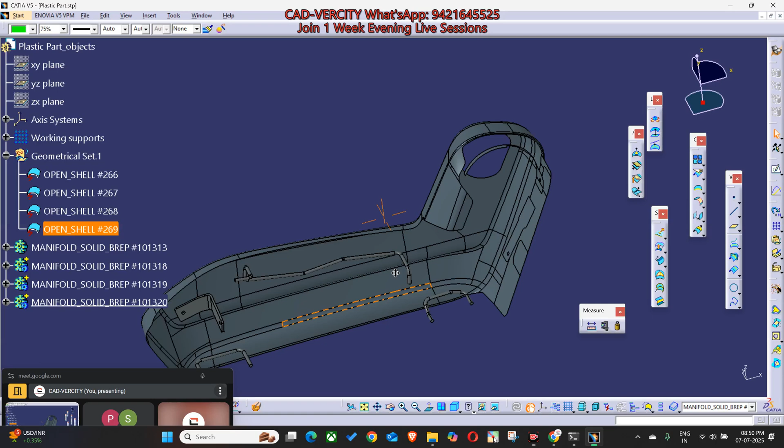Again, it is a side cover of the seat, and the input was this file. Okay, we have received this file in step file, and then what is the test requirement? Make B side surface.

Tooling line define. Tooling line. So as they have mentioned, tooling line means we have to define parting line as well. Okay, thickness will be 2.5 uniform thickness.

Okay, make highlighted feature, ribs needs to design as shown above. So highlighted feature, for the highlighted feature, let me paste here one image.

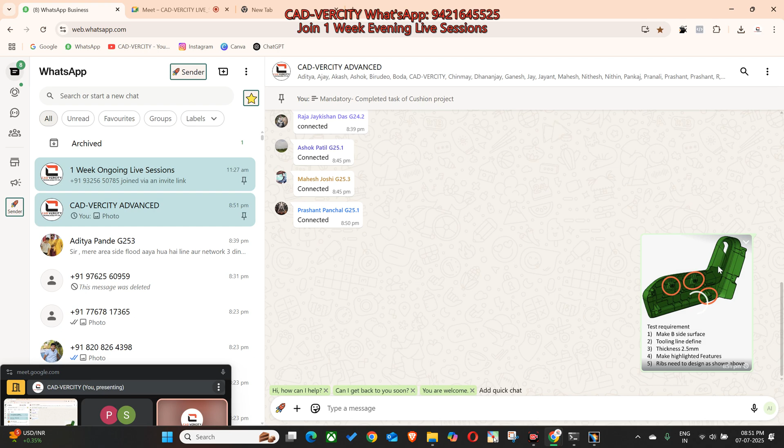Mahesh, is it correct? Yeah, okay, good. So here we have one, two, three hooks. These are the hooks. So we have to design hook.

So hook will be on. In this image, wire is in hide mode. So if we switch over here, I can consider this face, and the bottom one, this one. Let's change the color, make it yellow. So we have to design hook on this portion.

Okay, here will be another feature. Here I think we have screw. Is it screw? Yes. Again we have two screws from the back side.

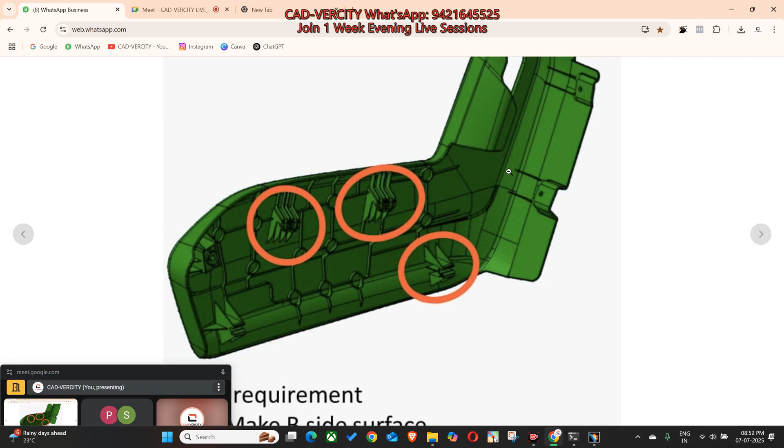Okay, these are the ribs. Yeah, we have screw because here is one metal bracket which will be fixed with side member of the seat. Okay, if I draw, just a minute, let me take a section

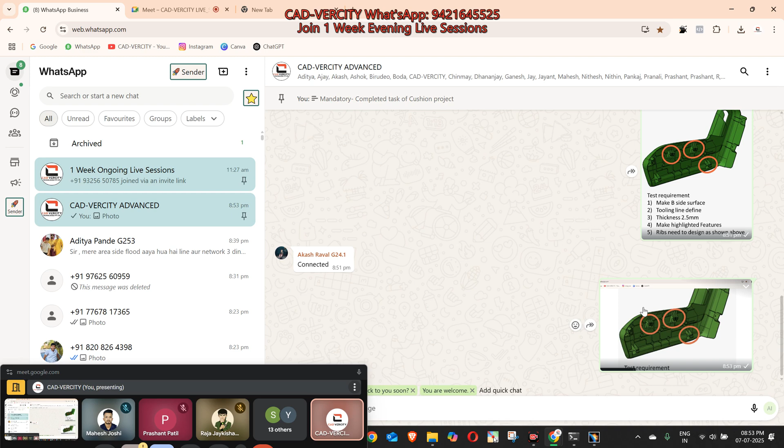like this. So, okay, let me show you the metal bracket. Can you see the metal bracket? Here we have again one hook.

Let's change the color. On this patch, we will apply screwing. So can you see this bracket? If I draw this bracket in this image, it will be something like this.

1, 2, 3, 4, 5. Can you imagine, yes or no? Here we have to add one screw like this. Clear?

And here we have one wire like this. One, it will be welded again with the side member. Here we have something inclined, then again horizontal, then again inclined. Then we have something like this, and we have a separate wire like this.

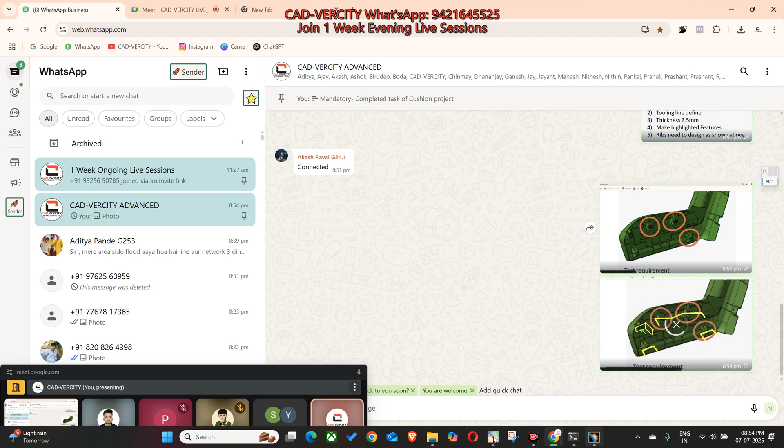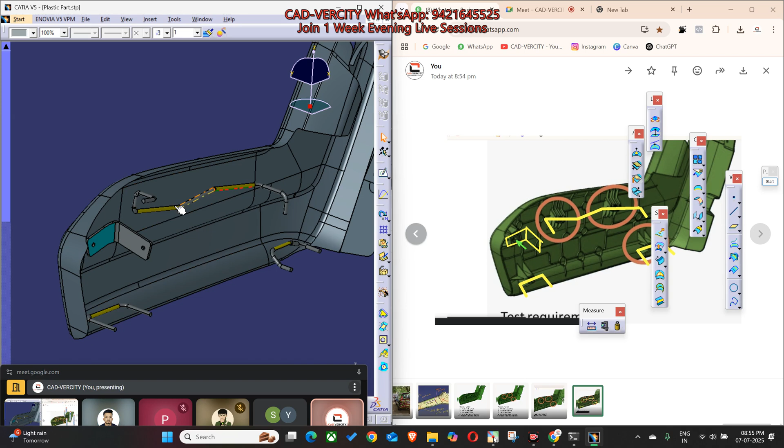Okay, perfect. Any doubt? No, sir. Like this. Clear? Yeah. Here we have one fixation for screw. Here will be one hook, one, two, top side hook, bottom hook, on the back side.

Okay, here you can see they have given some surface. What is the use of this surface? These are the surface of the metal structure. We can call it as, let's say, side member. Remember what is side member, everyone?

Let me open the file. Pillar side cover. Raja, do we have side member in this part? Hide and show.

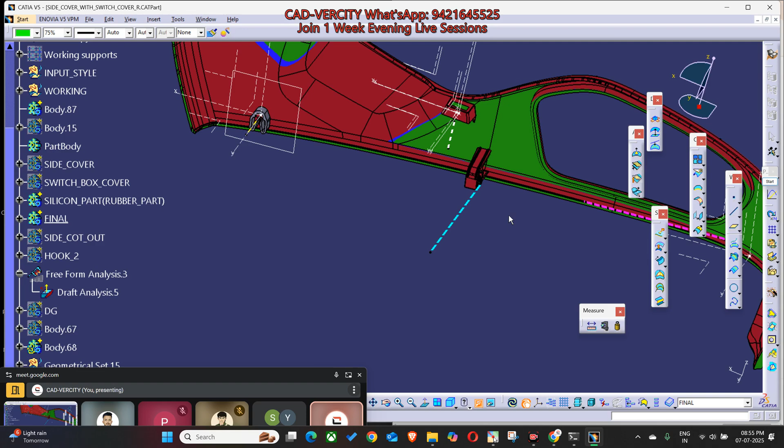No, okay, just a minute. Can you see my screen now, everyone? Screen recording on. Okay, so here you can see this is a side member. Can you imagine? Side member.

Yes, sir. So if I, this is the question, let's hide it. Can you see this part? Yes. Can you see this part? Yes, sir. We call it as side member.

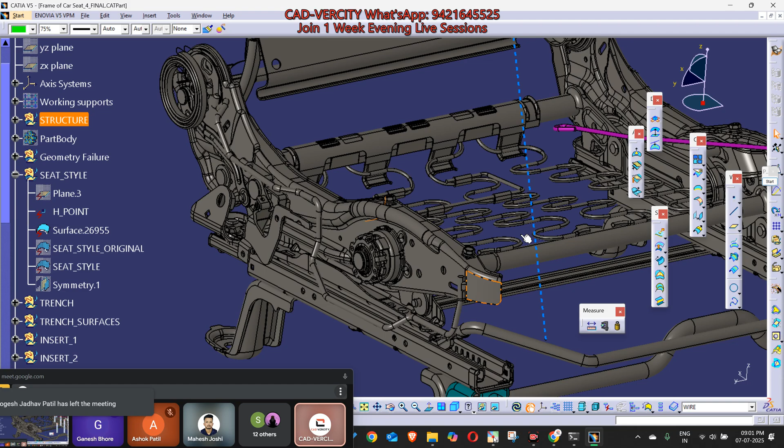This is side member. So if right now we don't have the side member, but just imagine if I say vertical window, hide this one, hide this one, again vertical window. Okay, now it is something like this.

So let's keep our metal structure with same orientation like this. Now can you imagine you are going to assemble this part. Okay, let's keep like this, and it will be something like this.

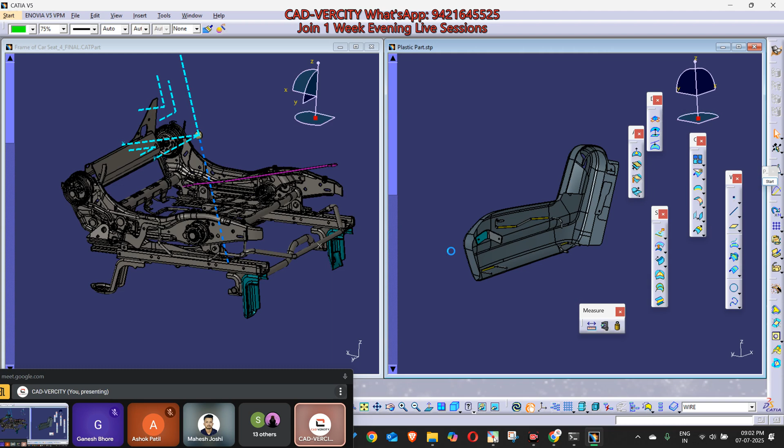Now can you imagine we are going to assemble this part from this side. Okay, let me try one thing. Product new, I will take one product.

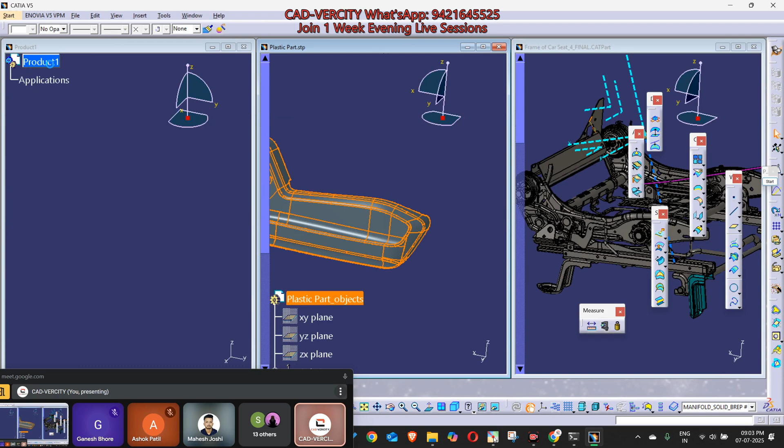Okay, vertical window. Copy this file. Copy, paste. Let's copy this product. Paste. Right click. Representation, terminal node.

Cancel. Here you can see. Can you see the side cover and our structure both are in different position.

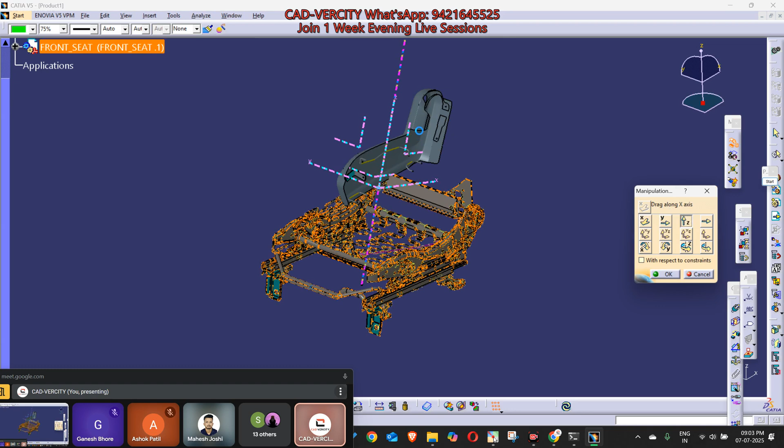So just for learning purpose, what I will do, I will just use manipulation. I will move this in X, again in Y. Can you imagine? This cover will assemble from this side,

something like this. Okay, let's keep click on Y. Sorry, X, Z, again X, like this. Say okay.

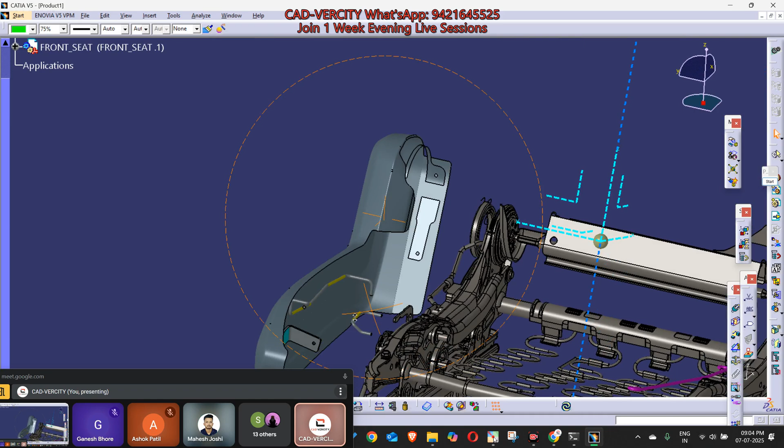Okay, now so what, how will be the wire assembled with the structure? Can you see this land? Let me change the color for this one. Make it blue. Make it purple. Again, make this purple.

Make this purple. Okay, so here you can see the purple color area. It will be welded with the side member. This is the side member.

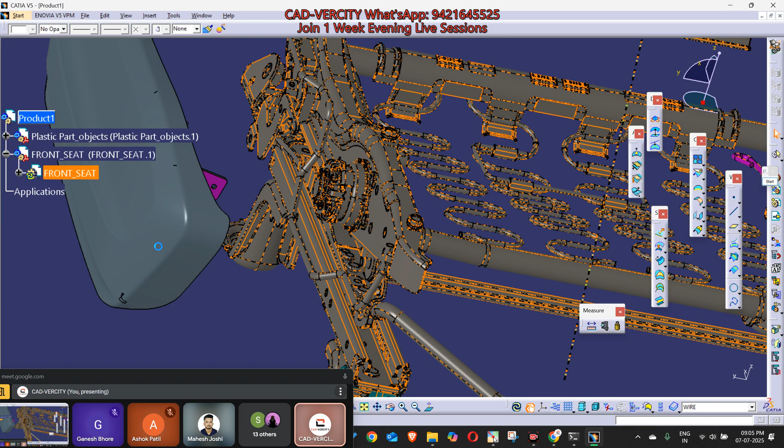Can you see? It is not a separate part right now in my file, but imagine this will be a single sheet metal part. It will be a separate part.

Okay, right now it is not a separate part, it is in a single geometric set. That's why I'm not able to show you it in different color. Okay, let me try.

Okay, let's convert this. Remove this one, say okay. Now it will be a single surface. Good, let's change color. Okay, it's already in different color.

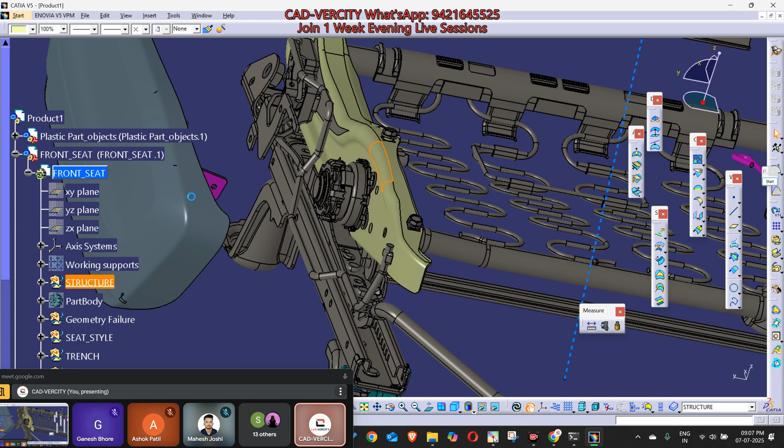No issue, I will make it isolate. Just a minute. Right click on this last option. Make it isolate.

Okay, now again, minimize, minimize. Okay, now can you imagine? See, the complete, this surface will also be the part of this one. Okay, so can you imagine, one, two, three,

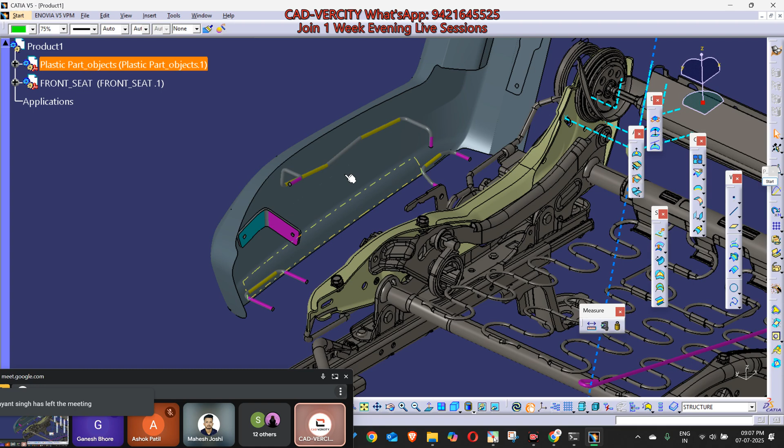three wires and one metal bracket are already welded on the side member. Now you have the side cover, with no switches over here. So you have to assemble this side cover on this wire.

Okay, so just for you, let's do one thing. Let's hide this one. If you want to see how it will be assembled, let me move this in Y side. I will just keep it dump. Okay, this is okay.

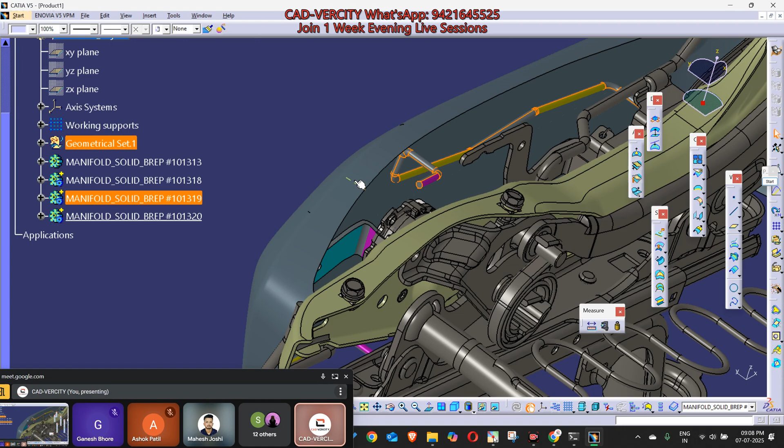Okay, right click, center graph. This body, double click. Copy this one. Hide it.

Double click. I will put that four bodies in this body as a result, say okay. Now see, double click. Right click, center graph, hide all four bodies. Now here you can see.

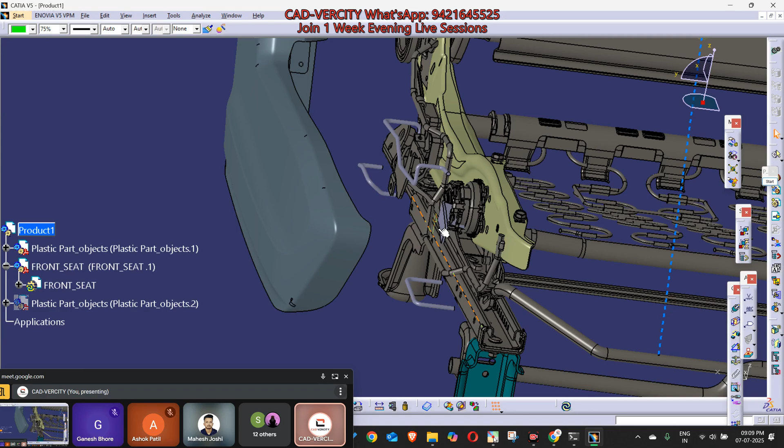Can you imagine now? See, this bracket is already welded on the side member. Wire is welded on this side member. This wire is also welded over here somewhere, and this wire is also welded.

Okay, now your job is to design this side cover, which should be assembled with this element. So what is this surface? This surface, this and this.

Just imagine that here we have some metal. Just a minute, I think we have metal. Let me show you, remove this faces. Delete these faces. For which one? That two extra surfaces. They have told me to delete that.

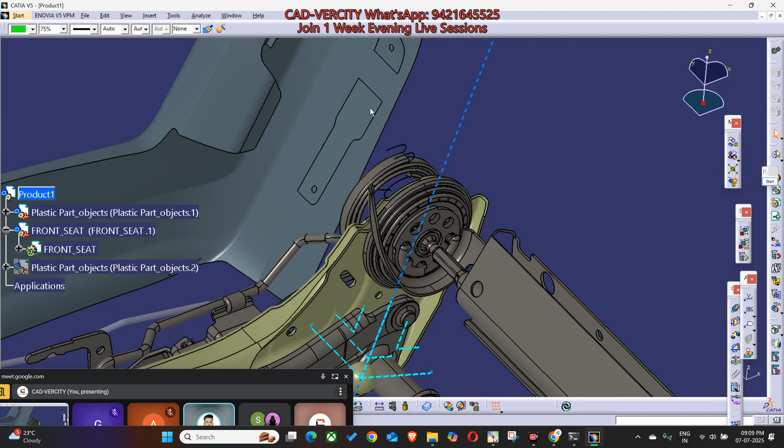Yes, see, these two surfaces are not the part of the side cover. Okay, let me show you what is this. Now can you imagine this surface? Can you see these two surfaces?

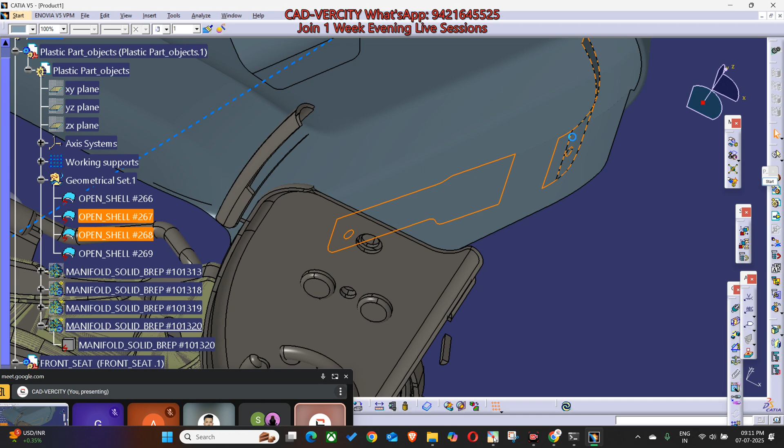Let me change the color for this two again. One, two, three, make it green. Okay, so the green surface is not the part of the side cover. Green surface means this part.

Can you imagine, yes or no? Yeah, green surface means this part. Yes. Okay, let me change into green. Okay, so just imagine now you can hide this surface. Hide it. Now imagine you have the green surface.

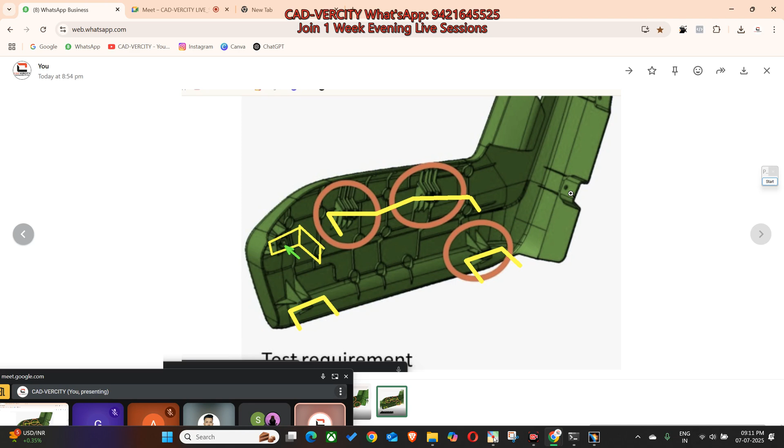Okay, here they have mentioned, where is the screenshot? They have mentioned, okay they have not mentioned, but in the image here you can see, one, two, they have used two screws. Okay, so here we have some patches.

So this screw, this position, here we are going to use screw like this. So we should have holes over here. Can you imagine, yes or no? There will be two holes on the side member.

Here, yes sir, we will have one hole. Here we will have one hole, here will be the second hole. Okay, so once we assemble the complete side cover, we are going to use a screw gun from the rear side.

Got it, Mahesh? What is the use of green surface? Yes sir. Now done, now what is your job?

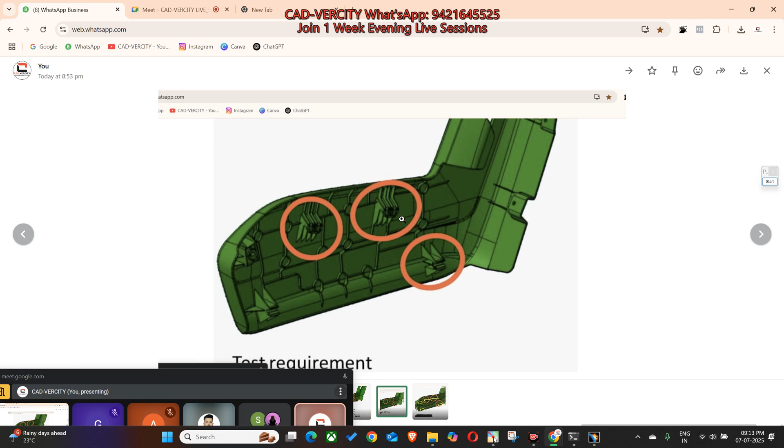Your job is to create one, two, three features. Here you can design a simple doghouse with screw boss. Here you can use power copy, no issue. Even though you can use axis to axis transformation. Here you can add two features. Now tell me, where is your doubt now? Where is the blocking point?

Mahesh? Others? Sir, they haven't given that feature, sir. So how we... can we decide? Okay, yeah.

Okay, so Raja, Ganesh, Prashant, we have learned how to design hook. Remember? Ganesh? Yes sir, yes sir. Mahesh, we have already done that part, okay.

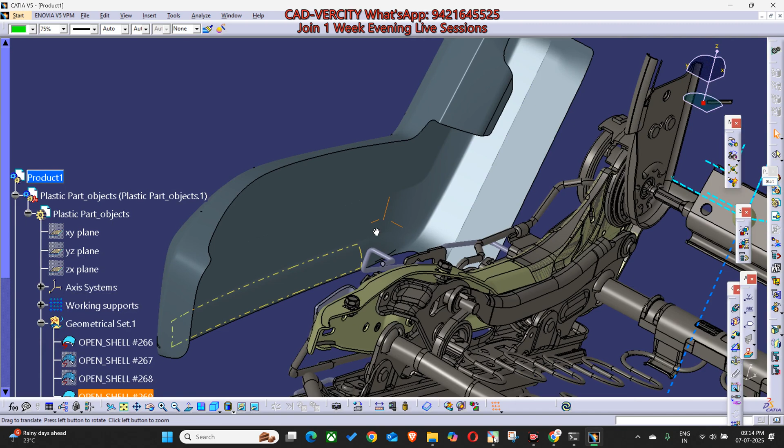But for the second batch, means Ashok, Subhajit, and Shweta, we have not done this. So we will start this from Wednesday or Thursday, okay. We will learn how to design hook, how to design doghouse, how to design snaps, locators, okay, parametric for any feature. Now we have this one.

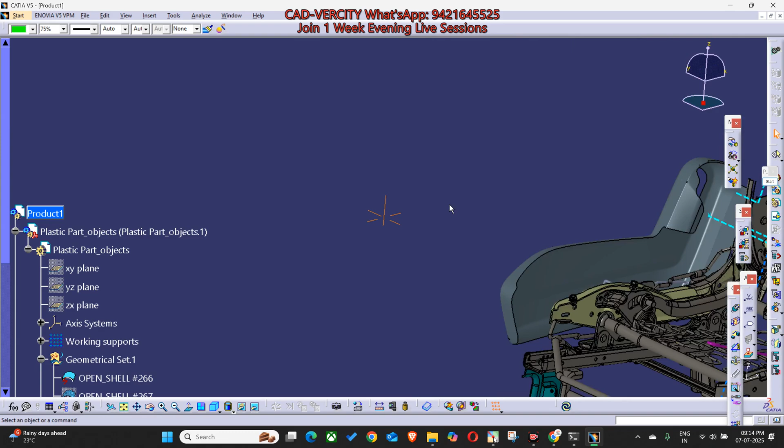Now our target is to design hook over here, on the bottom side as well. But the way in which we learned the hook design, we don't have to use the same methodology, okay.

Every time we will have to change our design as per our fixation requirement. You will have to check the assembly direction. Remember last time, side cover, in which direction we assembled the side cover last time in our project? In Y direction, Ganesh?

Z direction, Ganesh. Sir, remember we have slide from sir, Z, Z direction, sir. Everything was clear in Y direction for the main tooling, but assembly was in Z direction. Remember the switch cover, switch box, Ganesh? Yes, Akash, yes, Ashok, remember?

Sachin is here? Yes. Okay. Subhajit, are you in office? Yes sir. No? Okay, I'm in room. Okay, good.

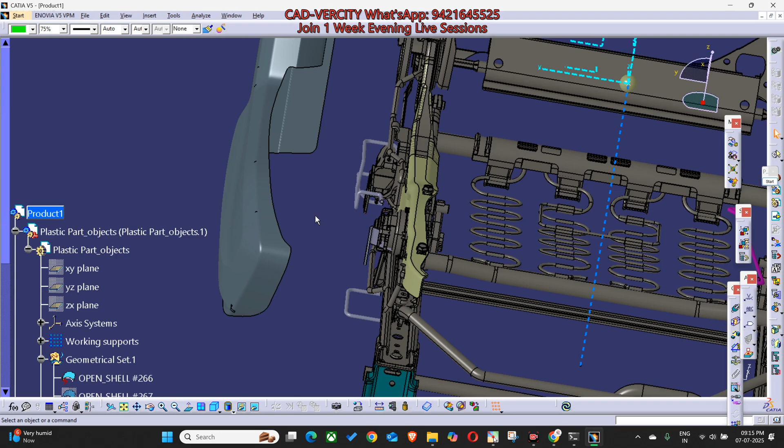Okay, so now this time again you have to think and decide from which direction you will assemble and how will be the fixation. What do you think the assembly sequence will be? This wire and the bracket, three wires and the metal bracket is already welded on the side member. Now tell me how will you assemble the side cover on this one, quickly?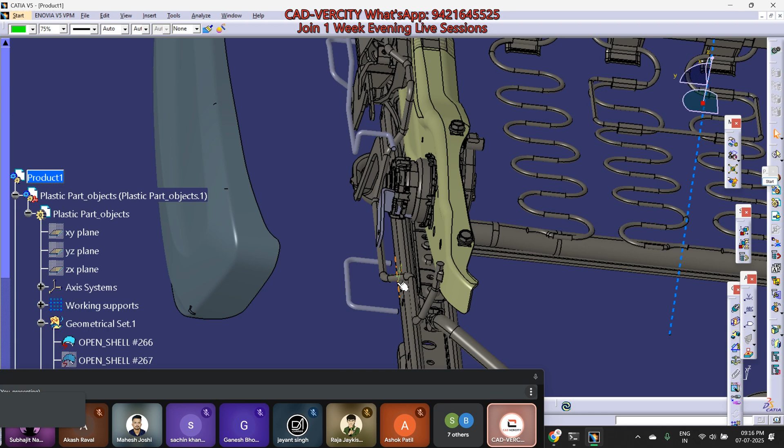Sir, we will take that bracket, this bracket, and both side holes, take center point of both sides, and take the line from it. Okay, no, but first of all, tell me what will be the sequence. Which feature will you lock first?

Will you do screwing or will you lock the hooks first? What do you think? Hooks. Chinmay is saying hooks first. How many screws do we have to use total? One, two, three, backside. Total three, correct? Yeah, three.

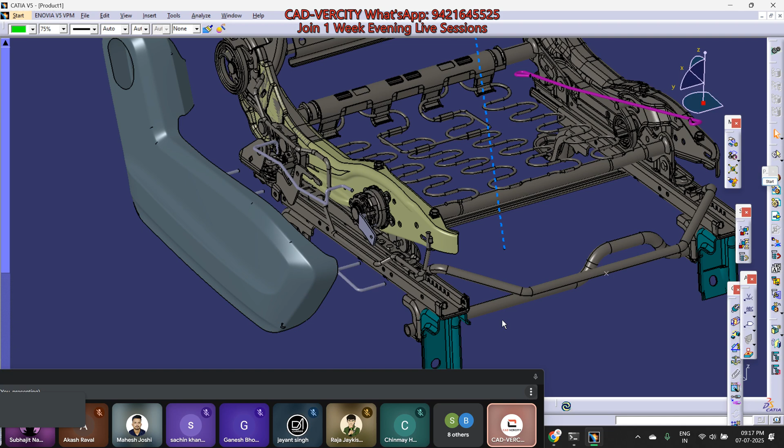And how many hooks do we have? One, two, three, total four. Because I haven't seen that type of features before, sir.

Okay, see, before. Suppose this is your wire, okay. Sorry, let me change the color. Suppose this is your wire. Now your green wire is going like this, okay.

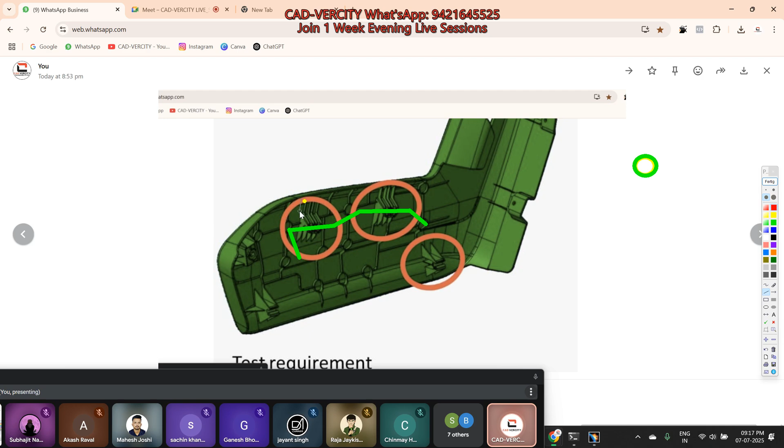Yes, perfect. Now for these two hooks, for the green portion, the hook will be red color. Now for this feature, one and two.

Suppose this is cover, okay, this is your cover. Your hook will be something like this: one, two, three, four, five, six.

Can you imagine your red portion, this hooks? Yes or no? No, sir. Others, Jayant, Sachin, those who know how to design hook? Yes, sir.

And for this feature, the bottom one, let's say bottom wire is something like this: one, two, three, four, five, six. For this bottom feature, if I draw the wire over here, now this is your bottom wire, these two wires. Your feature will be something like this: one, two, three, four.

Okay, so if I design this one, it will be something like this again. It can be something like this: one, two, three, four, like this. Got it? This will be circular. Can you imagine? Yes or no?

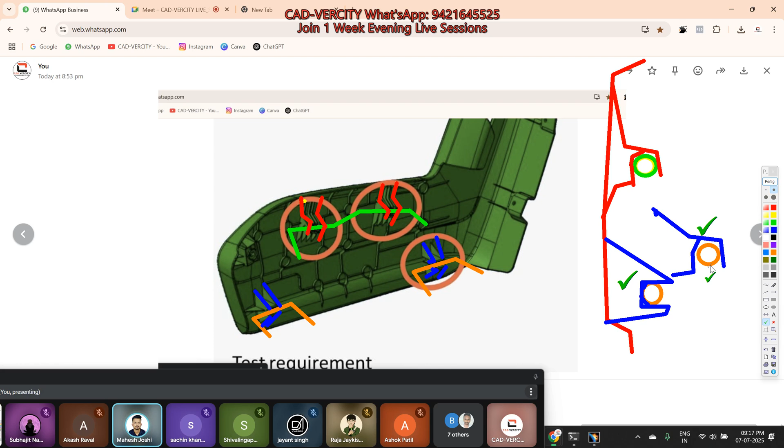Means at the same time you will lock the upper hooks, these two hooks, as well as the bottom hooks, in the same direction, using the same feature. So up you will bring your side cover like this and move it down a little bit.

Means the first operation will be you first lock all hooks. Now see, within two hands you have held the side cover. Now you have locked your side cover on this wire. Now tell me, can you remove your hand?

Yes or no, can you remove your hand? Suppose you are a person on the assembly line. Your both hands are free now, once you lock the side cover on the wires, yes or no?

Yes sir. Now from one hand you will use the screw, from the right hand you will use the screw gun. Now can you put one screw from this side and use the screw gun? Yes or no, from this side, because the cover is already assembled on the wire.

It is already locked. Now your both hands are free. We call this pre-locking. What we call pre-locking.

So is it important? Yes, it is very important. Pre-lock.

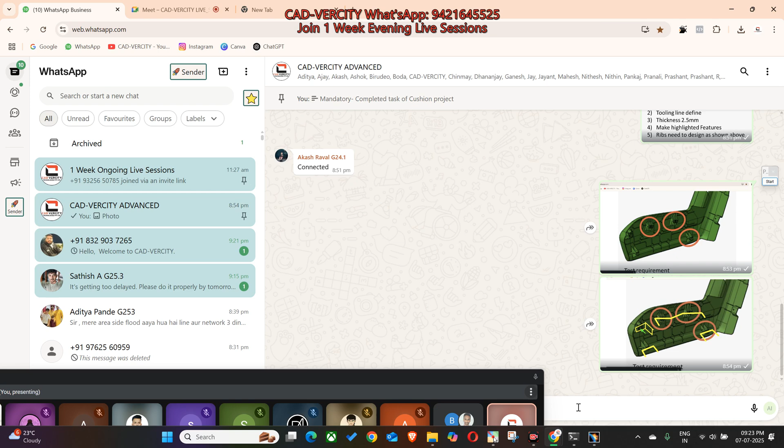Once you pre-lock this wire, you can use the screw gun through this hole. Then I will move to the back side. I will check the two holes from the back side.

We have these two patches, so there will be two holes on these two patches. I will put one screw, first tighten this one, then put the third screw, and again use the screw gun.

Okay, got it. Clear? Venkatesh, Shiva, clear. Birudeo, any doubt? No doubt sir, clear.

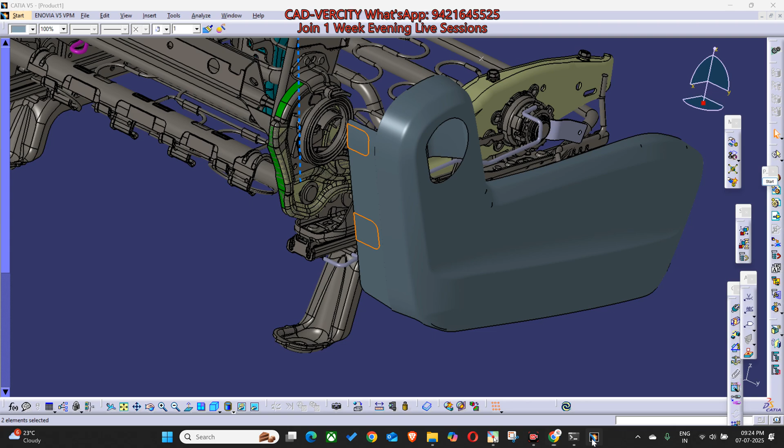Okay, now it's your job to convert this part into a closed volume with 2.5 mm thickness. Raja, Ganesh, Akash, Sachin, Chinmay, Prashant, both Prashants, Jayant - okay, now you have received this input.

And what was the time, Mahesh? Time limit? Sir, 1 hour. 1 hour, so 2 hours fast.

They have given me for remastering the sheet metal part, for remastering, and also its drawing for drafting, and this plastic part also - they have given me 2 hours for all of it, sir.

Okay, three tasks for 2 hours only. So you have to finish all 5 points within 1 hour. Okay, but it is easy, I think so, it is easy.

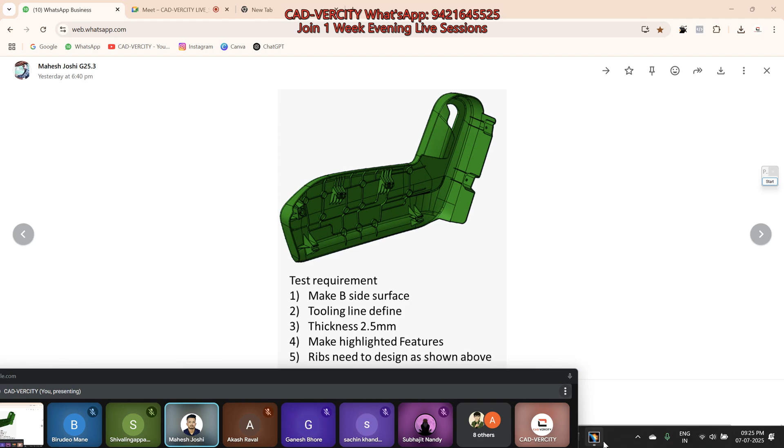If the surface is okay for the offset of 2.5 mm, then it is easy. Right click, open in new window. Say okay - sir, it has a patch, sir, in the A surface also.

Okay, let me check. Where is the style? This one, right click and okay. What is the purpose of that patch?

The smaller one, okay, this is for locking purpose. Also to hide the rat hole.

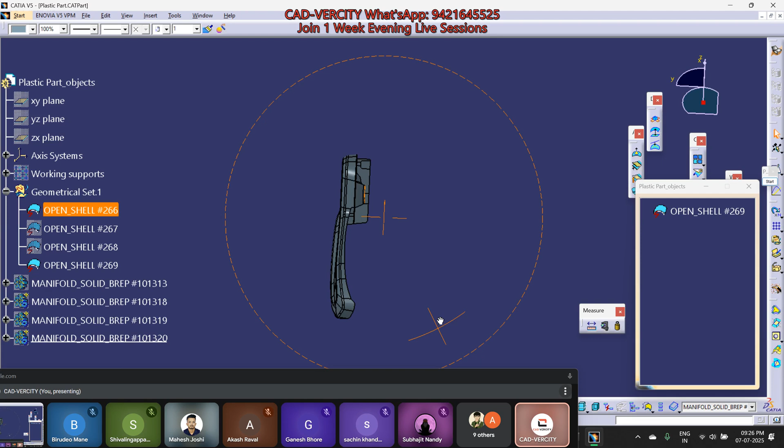What is a rat hole? Can you imagine? Let me tell you, rat hole means just a visible hole.

Suppose this is the backrest, okay. So the backrest will be something like this. Can you imagine?

And this will be the cushion, yes or no? Yes sir. This will be the bolster again. This will be the insert - sorry, this will be the insert area. Again, this will be the bolster.

Trenches. Okay, now there should not be any visible hole throughout this area, meaning between the side cover, backrest foam, and the cushion foam. There should not be any visible gap.

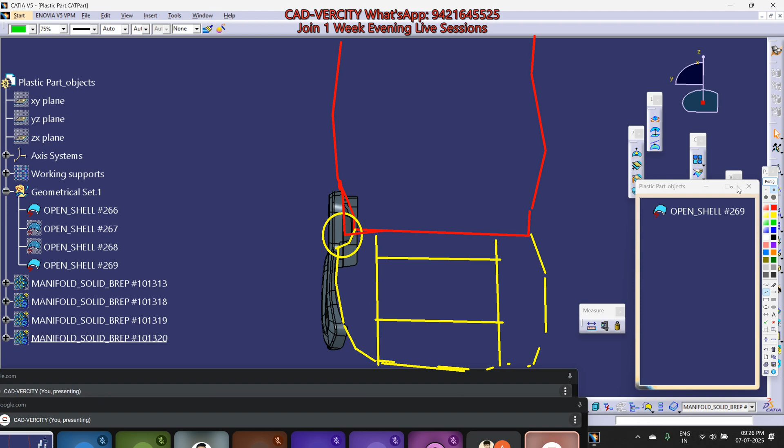Okay sir, then why have they added some extra material? We can increase the foam like this, or we can bring this foam directly straight like this. Yes or no? But imagine there will be some mechanism for the recliner. Yes or no? If I zoom in, why do they need this much gap?

Because of some recliner mechanism. So let me show you where the recliner mechanism will be. See, can you see the thickness? Yes or no? Can you imagine this patch will be over here within this gap?

This gap, yes or no? See, this cover style will not match this structure, so don't consider it like this. But just imagine, suppose if you design this style for this structure, it will be something like this. No, see, it will go up.

Okay, it will go inside. It will be some downside again, then come up, and it will be something like this. Can you imagine? Yes or no?

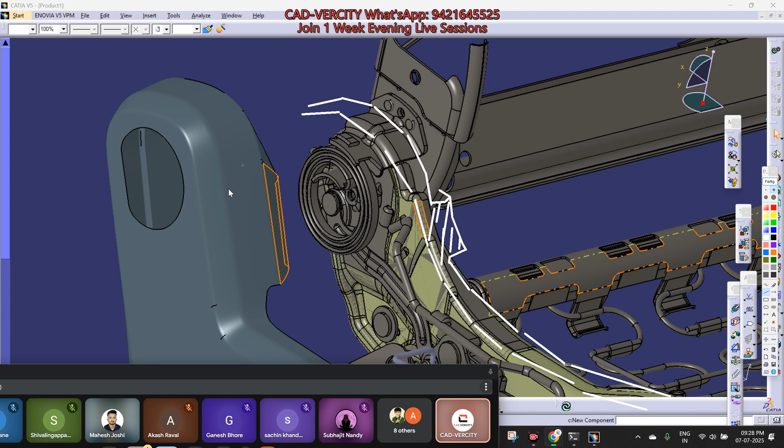Yes sir, so this patch, what we need to hide the hole, this is the patch. Got it? Yes or no? Yes sir, everyone got it - Shweta, others?

Okay, now we call it as a rat hole. Okay, done.

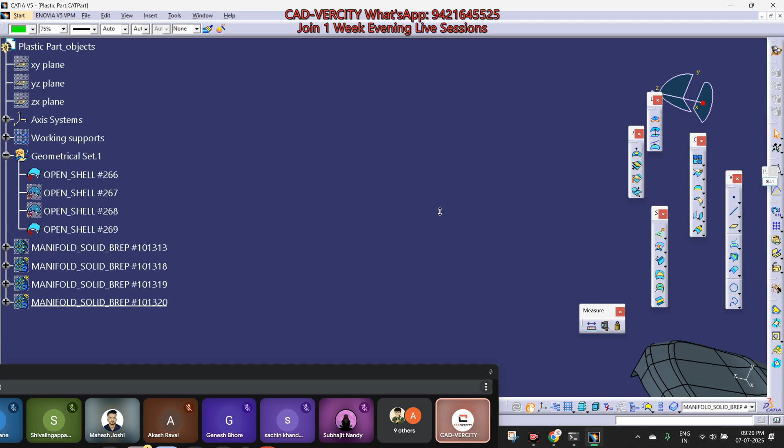Now let's start. Can you work on this one directly or do you need my help? See, if we add a geometrical set, let's check. Can we offset this one directly? Right click surface, okay, can you see?

Can you see what is this one? Any idea what is this? What is the use of this one? They will cut this part.

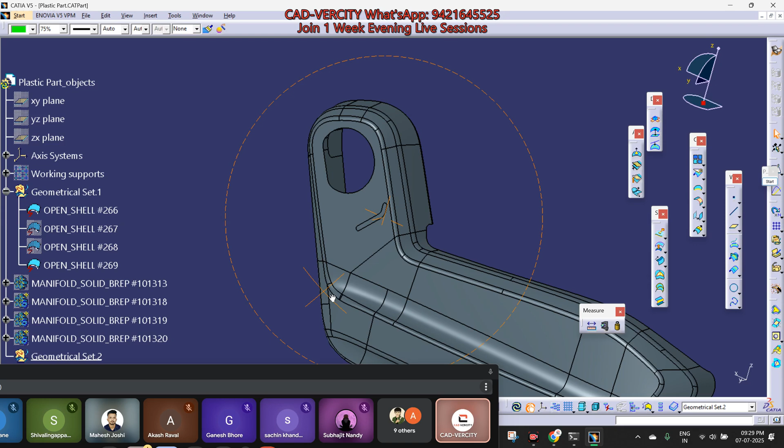No sir, see, there will be one pocket. From this one you will get one latch, like this. For recliner purpose.

Okay, you can just pull. You can hold this one like this. This will be the thumb and you can pull up, the seat will go back - recliner. That's why we will need one cutout over here.

Okay sir, shall I consider everything in closed volume? See, for closed volume you will have to avoid this cutout. Just treat this patch as a single patch without any holes.

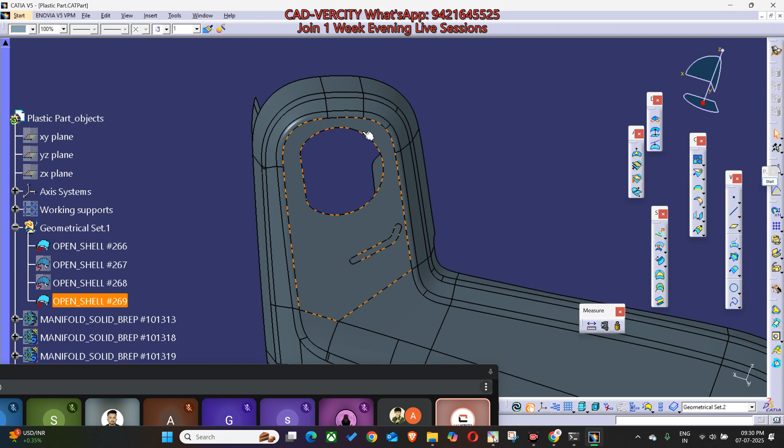Got it? You will provide the hole as per project requirement. Clear? So for the closed volume, you should close this hole. So how to close it?

See, extract, no propagation, isolate, say okay. First I will copy this one, paste in my geometrical set, right click, rename this one as my working.

Everything should be in caps. No use of this one. Right click, I will rename the surface as input style. Minimize, untrim, enter. Okay, I will hide this one.

I will use boundary for this - see, this is a trick. Please focus, I will use outer boundary, say okay. I will hide this one, show untrim, and split it by the boundary.

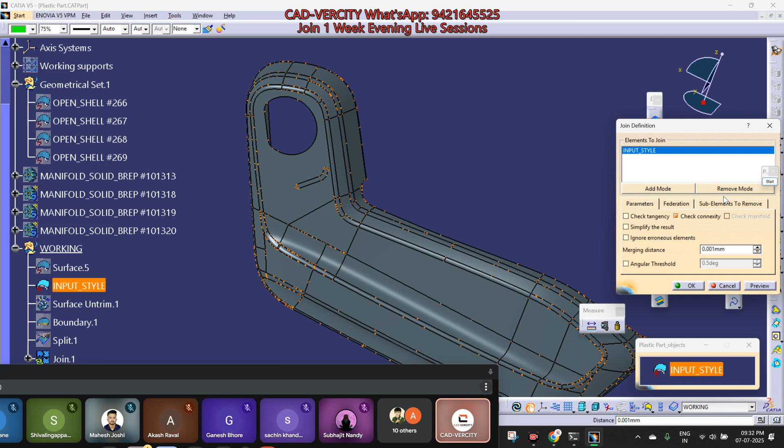Okay, now I will hide everything, show this one, apply join. I will remove that patch using sub-element to remove. First I will select this surface, then sub-element to remove - I will remove this patch as well as this patch. Then I will show the split surface and just join it.

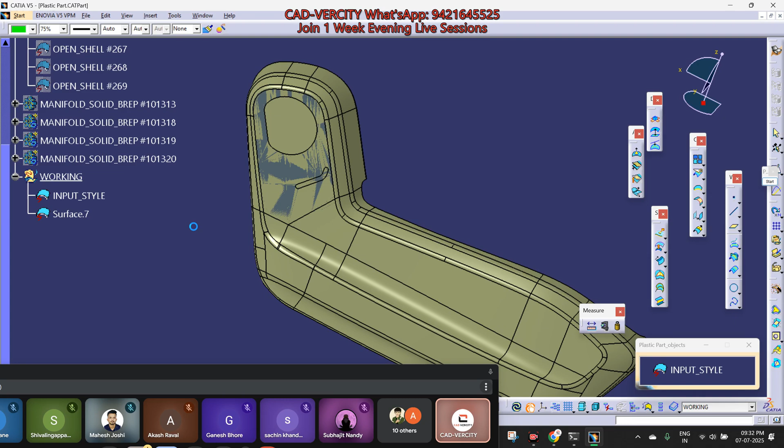Any doubt? I will make it isolate, delete everything, just keep the input surface. Enter. Any doubt? Clear? Prashant, Mahesh, Chinmay - yes sir, okay.

Now let's try to use offset. Where is offset? Offset this patch inside by 2.5.

Reverse, reverse. The cutout that was there - should we take it or not? No, you will have to avoid that cutout that was there before. You'll have to avoid that one. I will explain.

See, in the offset command, what it is telling you sir - the red patch, the patches which are in red, I'm not able to offset that surface, but I can offset the rest of the surface. So shall I offset? Say yes.

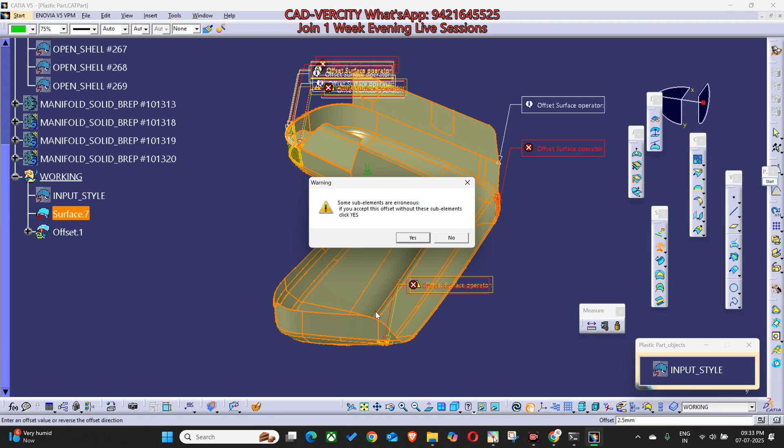Got it. So this is my input style. Change the color, make it blue. So this will be my outer surface. Suppose the blue is the A surface. I will take the offset inside.

Everything is good, but this patch is missing. I will recreate this patch. I will use this patch as a B surface.

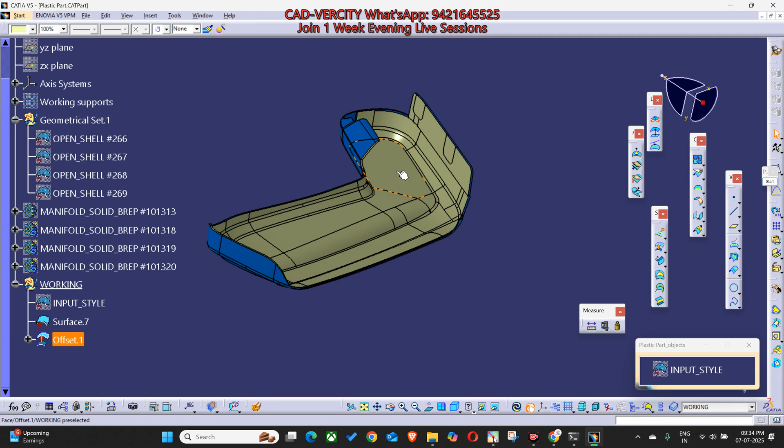Good. Nearly 95% is okay. So how to check? Select the surface and apply boundary. Let's check where the boundaries are. See, can you see a small gap? See this one.

Did you notice why there is a gap? Because of this hole, can you see? There are some missing patches in our A surface. We have one missing patch in the A surface.

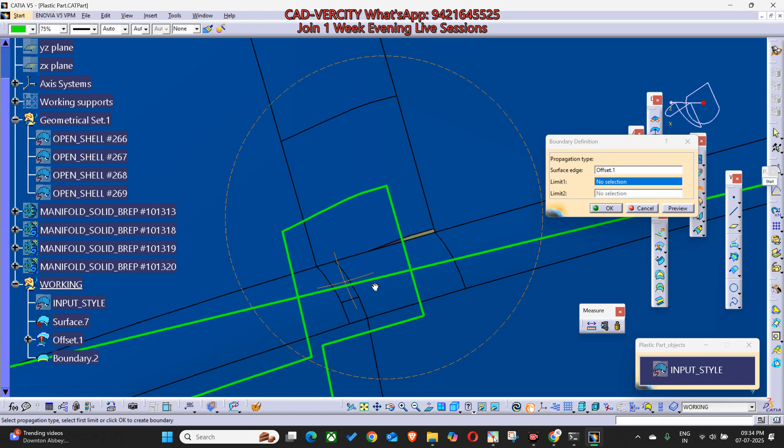Okay, yes, here sir, we have a gap. Here we will have to rework. Again, small missing patch. Did you notice again, why? Because of this patch, the bad surface.

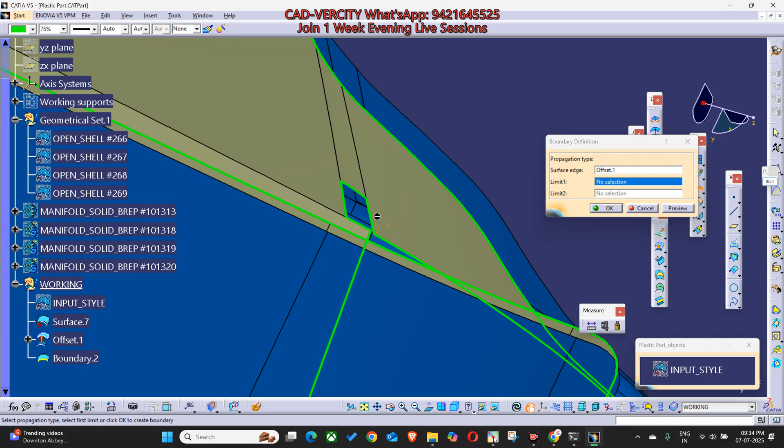Okay, so don't repair this one. Just try to fill inside because you don't have time. You have only 1 hour. In 1 hour, you have to finish the close volume.

Again, if I say okay, keep all sub elements, say okay. So I will keep this in this mode. Why? Because whenever I work, I will not use the boundary command again and again. I will just show and hide this command.

So I will work over here. Again I will show this one, I will check, okay, then I will work over here. I will hide this one while working. Again I will check with the boundary. So like this, you will have to work for the 2.5 mm thickness. Then you have this wire.

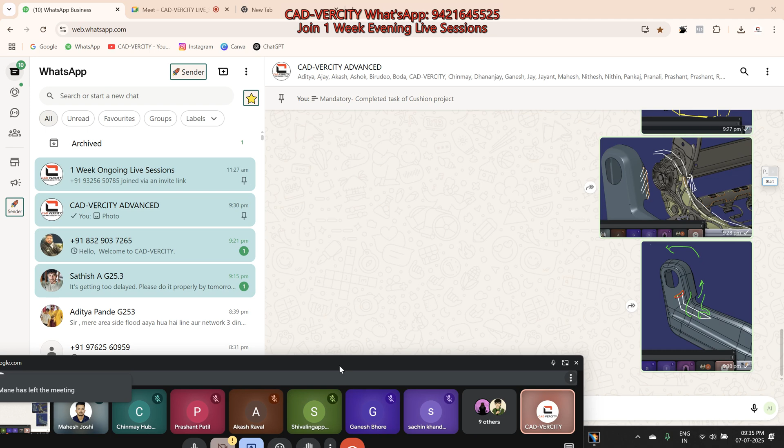Okay, now tell me, from advanced batch, tell me how will you start for the hook design?

Yes, Akash, Ganesh, Raja, Sachin, Chinmay - how will you start for the hook design? Quickly.

Yes, Raja, Sachin, Prashant. Sir, after close volume, then decide the lifter direction. Sorry sir, main tool direction, sir. Okay, MTD, main tool direction. Then after MTD is decided, okay, first will you work on the close volume or first will you decide the main tool direction? What should be the sequence?

How will you start? First the tooling direction, sir. Okay, tooling. Okay Prashant, then?

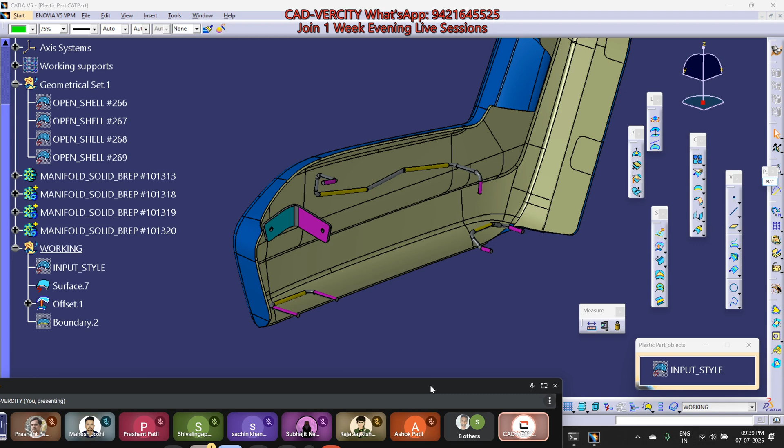Then draft analysis for what? To check the undercuts. To check the undercuts in, no, on which element will you perform the draft analysis? Class A surface, sir. Awesome. On A surface you will perform the draft analysis. Good. Then?

If everything is good, then we will proceed for the B offset. Excellent. Then, after completion of the B offset and C surface, we will make it close volume, and then we proceed for the B side features. Good. Then?

If they have provided any mounting features for the environment, sorry, we will take a point, sir, taking the reference from the environment. And then we will take an axis system on that point, and then with respect to the tooling direction, we will develop that one, sir.

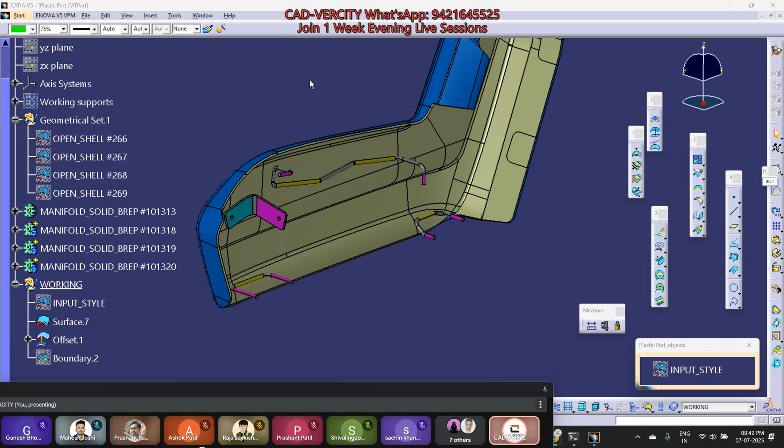So for the first feature, let's say I want to design one hook over here. What will be the first process? First step: extract the surface of the wire. Okay good. And then make it tangent to the curve.

Sorry, the hook - the profile of the hook should be tangent. Okay, see Sachin, as we discussed in this image, this one, the red one, yes, the hook will be like this. Okay.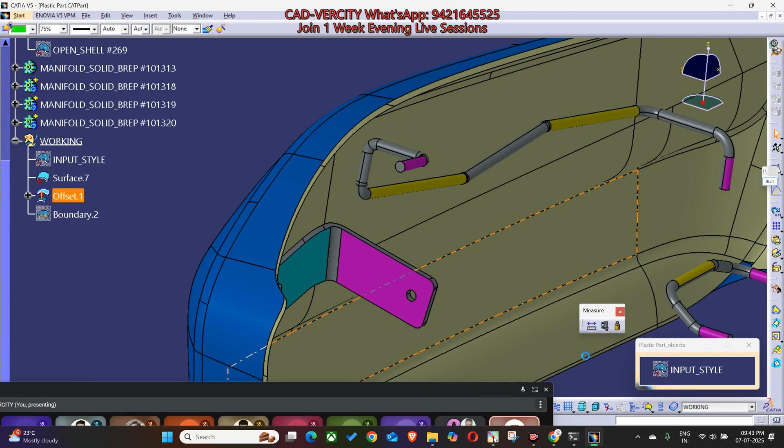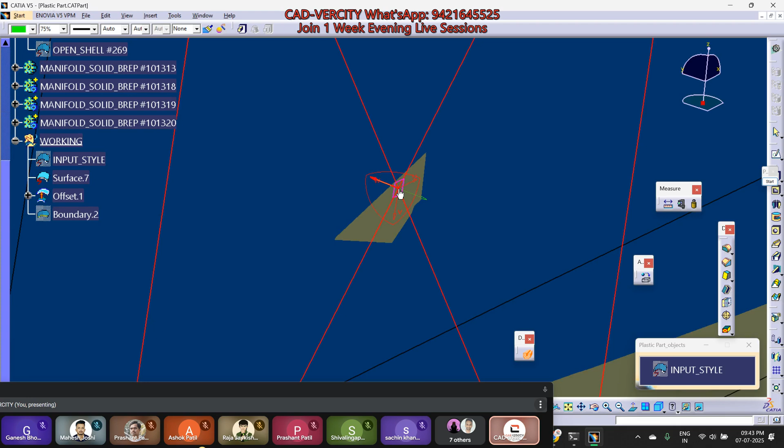So if I take a section in this view, means in X view, okay, someone will ask you - let's say Sachin is in a meeting, so I'm the counterpart, so I will ask you: Sachin, please take X section on the wire. X section means, here you can see the X direction. X section means section perpendicular to X, means on the wire, something like this. This is X section, can you see we are perpendicular to X nearly?

So if someone is asking you to take a normal section to the wire, or take X section on the wire, this is X section. If someone is asking you to take Y section, means this one - yes or no, this is Y section.

Okay, so we will take a point - it should be on the center curve. Yes Sachin? Yes sir, somewhere over here, the center curve of the wire. Then let's say our MTD is in Y. Then here is Y.

Next step, Sachin, what will be the next step? Prashant, Raja, Ganesh, Akash. Axis, axis system. Axis system, good Ganesh. How? What will be the orientation of the axis system?

As per MTD, as well as per the OR compass direction, wire, yeah.

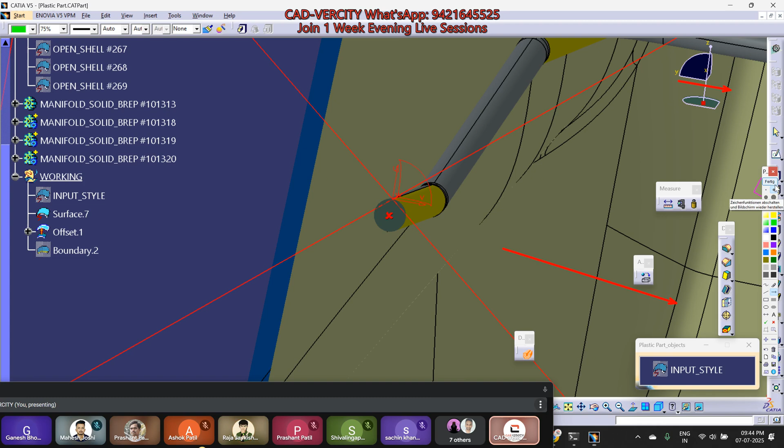Wire neutral axis. Okay, if I click on Y, wire is not perfectly in X direction. Click on Y again. Can you see it is inclined a little bit? If you click on Y, it is a side view. See, both are inclined. So our axis system will be upside and like this. Yes or no?

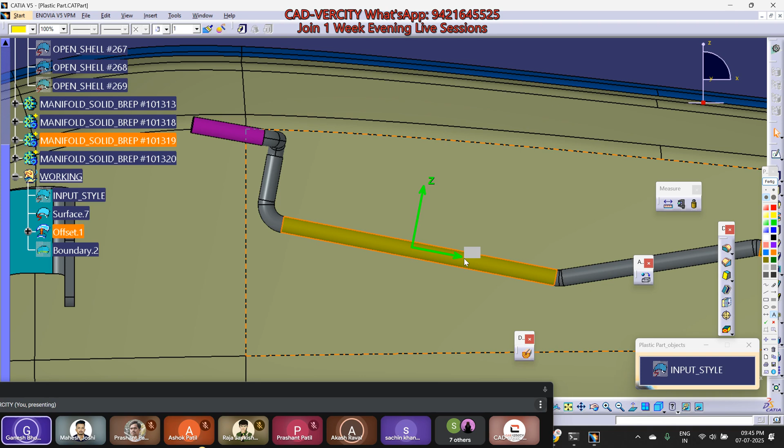And Y will be along the center curve of the wire. No, along MTD. Sachin, along the center curve of the wire, we have taken X. See? Okay, so how?

Just see, again let's click on Y. Again click on Y, I want backside view. Just focus on this one. Can you see this X, Sachin? Yes sir, that's why.

Suppose this is my, I will take a midpoint of this patch. This will be my Z, perpendicular to the axis. This will be my X. Can you see this is X? This is Z. And Y will be my MTD, yes or no? Yes sir, yes sir.

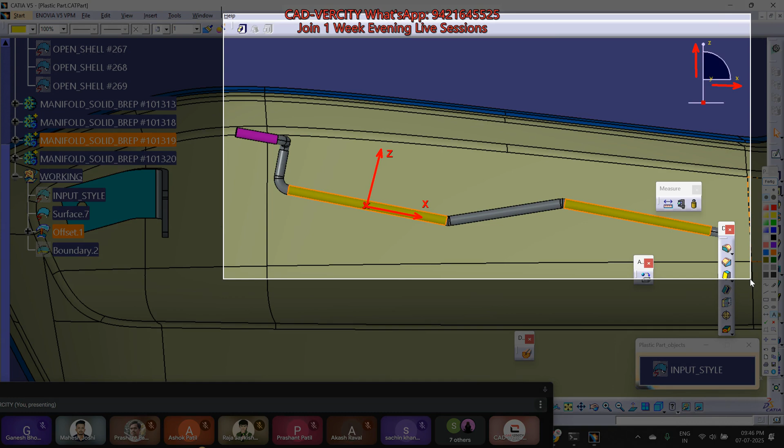Good. Now can you design hook? What you will use from this location to this location? You have to design the second hook.

Axis to axis, or power copy? Power copy and axis rotation change.

Where is your section? Okay, see these hooks are something different, okay? Yes, what you will use from this location to this location.

Quickly. Power copy, sir. Why power copy? Orientation is not identical, both features.

Okay, why not axis to axis? Copy paste special as a link, and then use axis to axis transformation. After that it's difficult to modify orientation. But why do we want to modify orientation? Okay, we can change the orientation.

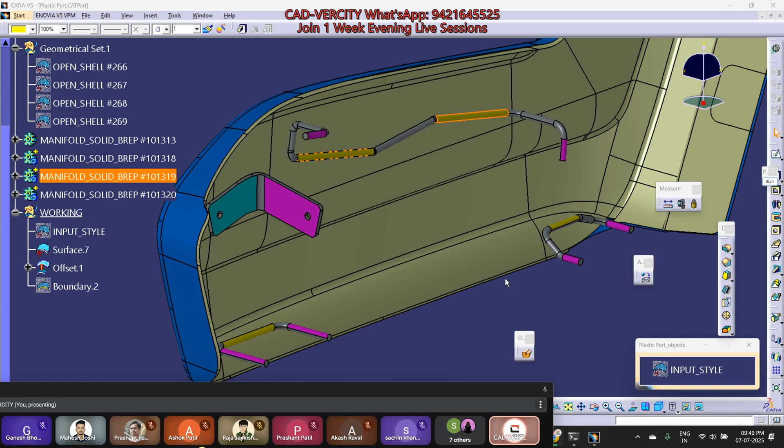Tell me Ganesh, in axis to axis transformation with CCP link, on which component will the orientation of that element depend? Sir, because the wire was inclined, then the sketch will be changed. Sorry Akash, wire for inclined, so not same.

Why will it change? Sketch, wire sketch will be changed. Inclined wire portion, sketch will be changed? No, but we are using axis to axis transformation with CCP link.

If you are using CCP link and axis to axis transformation, you will not get a second chance to change the sketch. Yes, it will depend on the first sketch, first body from where you are copying.

Yes Akash, yes sir. But tell me, how will you maintain the hook orientation with respect to the second wire? Let's say second patch, this one. Suppose you have designed one hook over here, now you have to design the same hook on this position. Which method will you follow?

Power copy or axis to axis transformation? Axis. Why? Both are the same. There's a height difference, sir. Maybe it may have height difference.

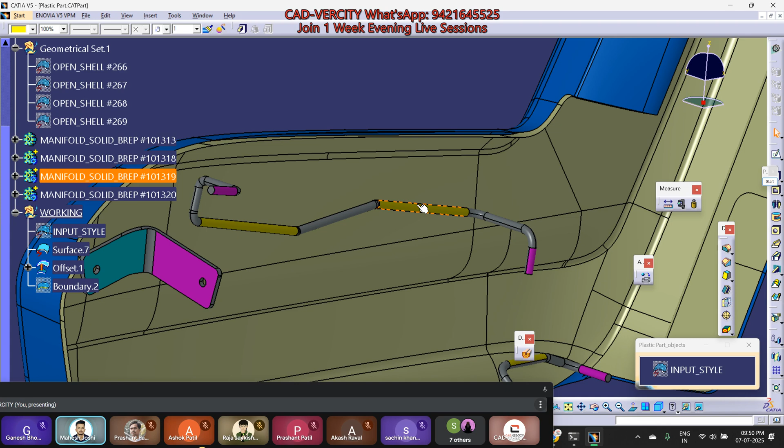And also the direction of both are different. Okay, so if we power copy it, then we can direct it, or orientation. Can we use it as a direction of that wire? We can use it as a direction of the wire, for the rotation, or for the axis system.

For the axis system, in which method? In power copy. Yeah, in power copy we first use their axis system. We put their axis system on that point, center point, and after that, on that axis system, we will power copy it. So we will use it, and we can adjust the height of it.

Okay, see, we have to finish the complete test in 1 hour. Let's say 1.5 hours, okay. So you should be able to take a decision whether you will use the power copy or whether you will use the axis to axis transformation with CCP link.

Okay, CCP link means what, sir? Mahesh, we have covered this in the training. Okay, let me tell you the basics. What is CCP link? CCP link means suppose you have designed something over here, you can just replicate this feature over here in one shot. But suppose if we want to modify this feature, you will have to modify this one.

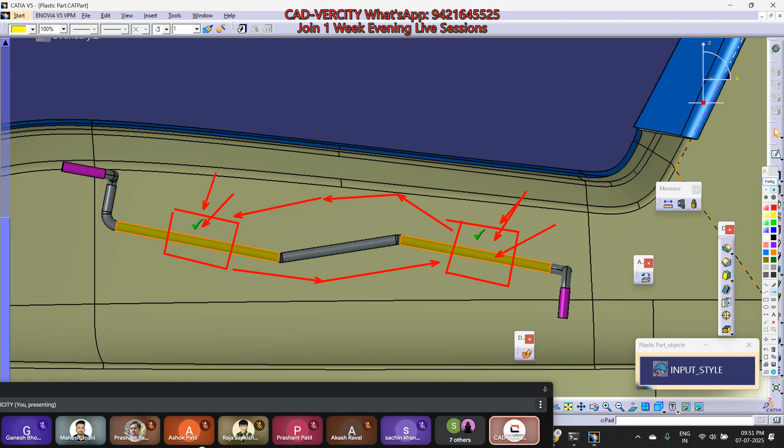The second feature will be in relation with the first one. Suppose you designed this body by adding, removing, assembling, union, trim - using 6 or 7 bodies to design the first one. Now if you are using CCP link, this will be a single body. You will not get multiple bodies inside this one, so it will not be editable directly. To edit this, you will have to edit the original body - it is just a copy body with link, copy with link.

So now just think on it, and try to finish it. Everyone, you have the file, just try to finish it.

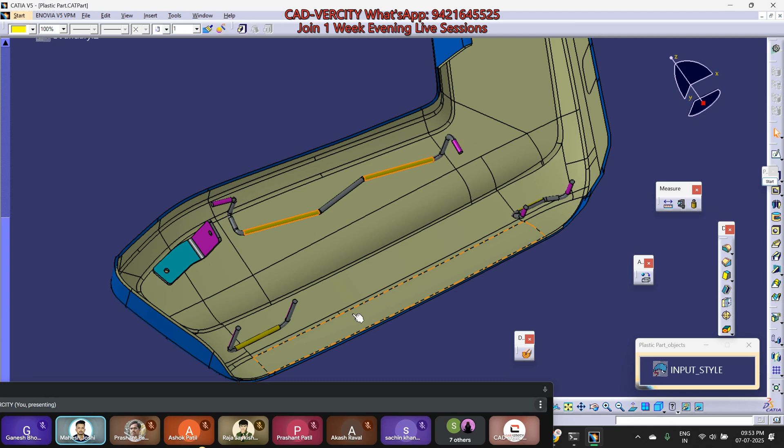Any doubt? How much time will it take if we create the close body and the three highlighted features - if we just create those three features, how much time will it take? It should take maximum 1.5 hours, that will be sufficient for this.

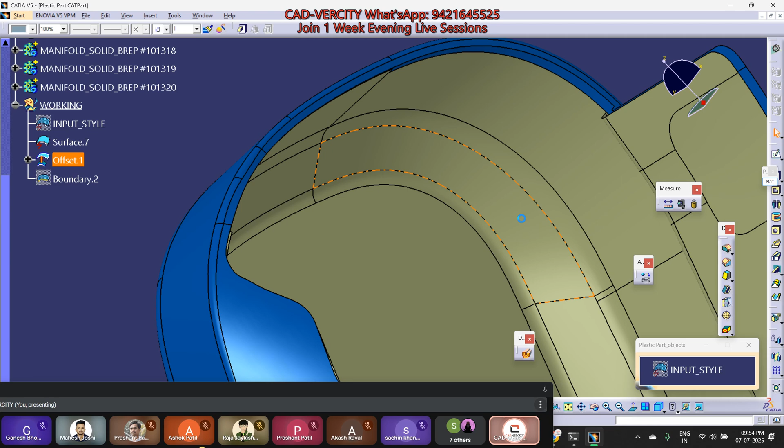There is no issue in the close volume - some small patches you have to do. I think it will take some time for the C surface, because there is a C surface given at this portion, and above it is not given... is it given? No, the C surface is given - this one, yes, we will use this one. We have this one, but the other side we don't have, so it will take time.

Just think on it and try to finish it, and actually record it. Actually, I have done the B surface and filled all the patches, A surface and B surface. Just for the C surface, I have that problem, so it has been taking so much time - 45 minutes I have spent. So they told me to close this and start remastering, so they haven't given me time for the rest of the part.

Okay, good. So just do one thing - take this file, you have this file. I will not share my file, but you have the wire, you have the bracket, you have the A style. Just try to finish it in 1.5 hours, everyone.

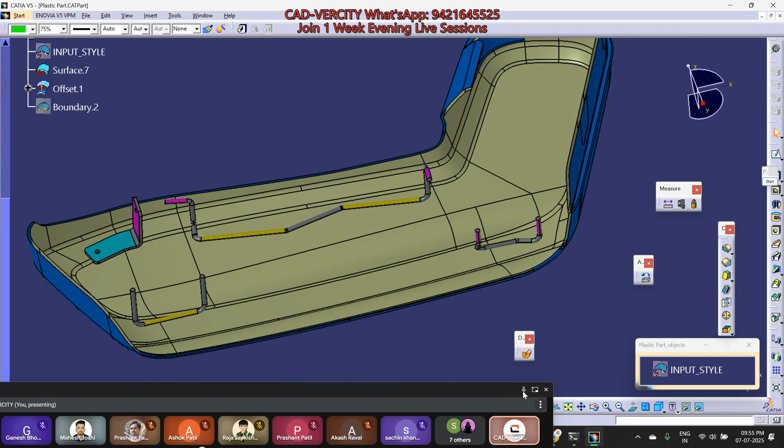Chinmay, Akash, Ganesh - you already know how to design the hooks. Just try to finish the close volume first, define the parting line, sorry, the tooling MTD, close volume. Even though in draft analysis for the A style, if the surfaces are not clearing in MTD, just leave it as it is. Just create a close volume and start the B side feature. Clear?

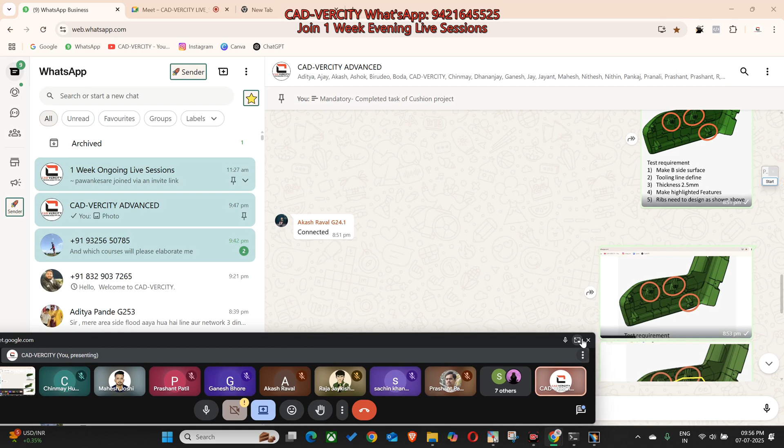You have this as an input - you will have to add ribs as well. As I shown above, highlighted feature, thickness, tooling, and B side surface. Good. Any doubt? Please share the file, just drag it in our group.

While doing this assignment, please use your stopwatch. Set the time of 1.5 hours - instead of setting 1.5 hours directly, set three timers: 30 minutes, 1 hour, and 1 hour 30 minutes. This way you will get an idea - at 30 minutes we have only 1 hour left, then we have only 30 minutes left. Every assignment should be done with a timer - without a timer there is no meaning. You have to finish it in 1.5 hours, that's it.

Use shortcuts - left hand should be on keyboard. New candidates who don't know how to use shortcuts, we will learn it later, how to set up the shortcuts from the keyboard. Clear? Shall we stop?